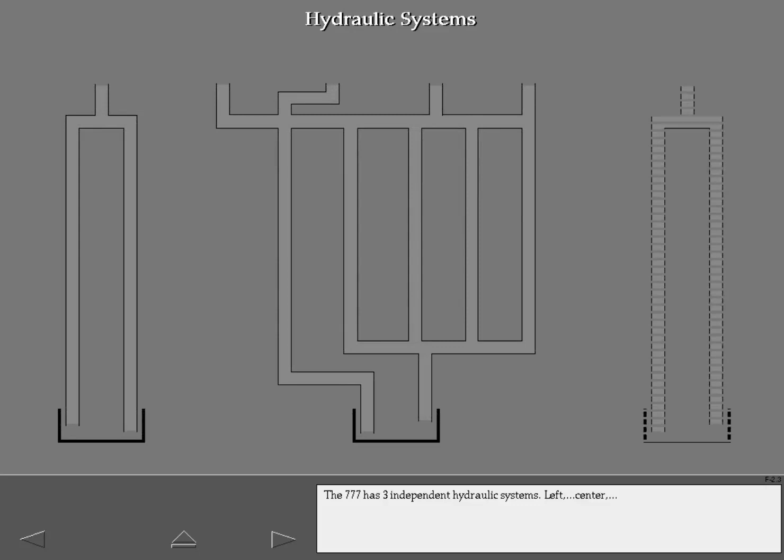The 777 has three independent hydraulic systems: left, center, and right. Each system has its own reservoir.

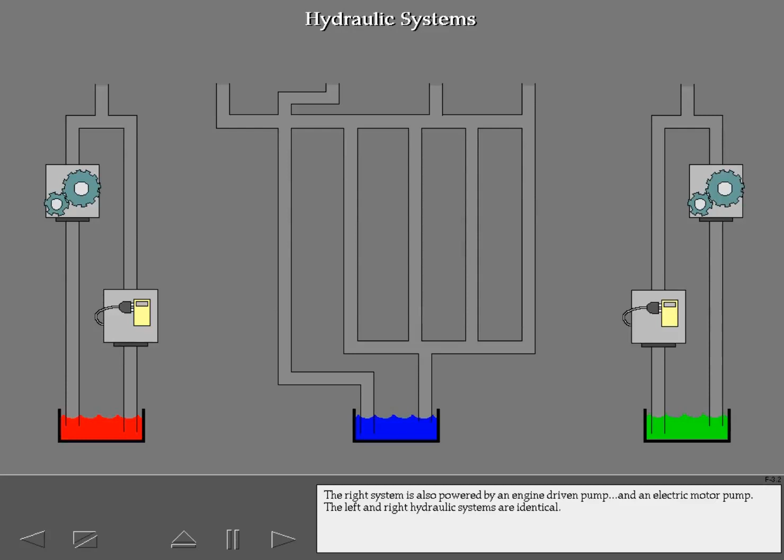The left system is powered by an engine-driven pump and an electric motor pump. The right system is also powered by an engine-driven pump and an electric motor pump. The left and right hydraulic systems are identical.

The engine-driven pumps are the primary pumps. They are the main source of hydraulic power and operate when the engines are running. The electric pumps are the demand pumps. They supplement the primary pumps when system demand is high.

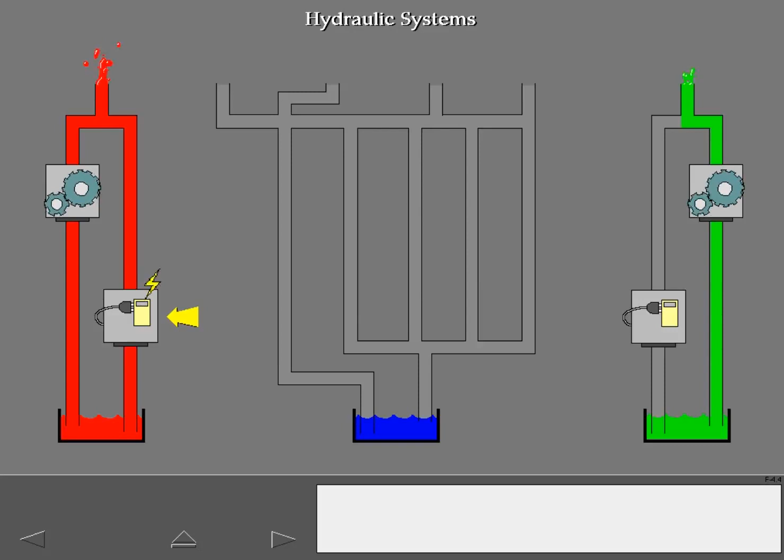The center hydraulic system uses two electric pumps as the primary pumps. Two air-driven pumps serve as demand pumps. The air pumps are powered by bleed air. Depending on demand, one or two pumps operate.

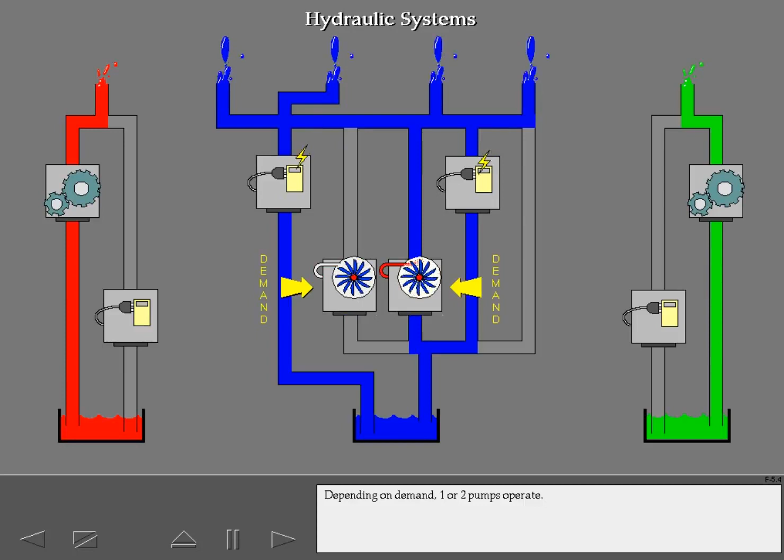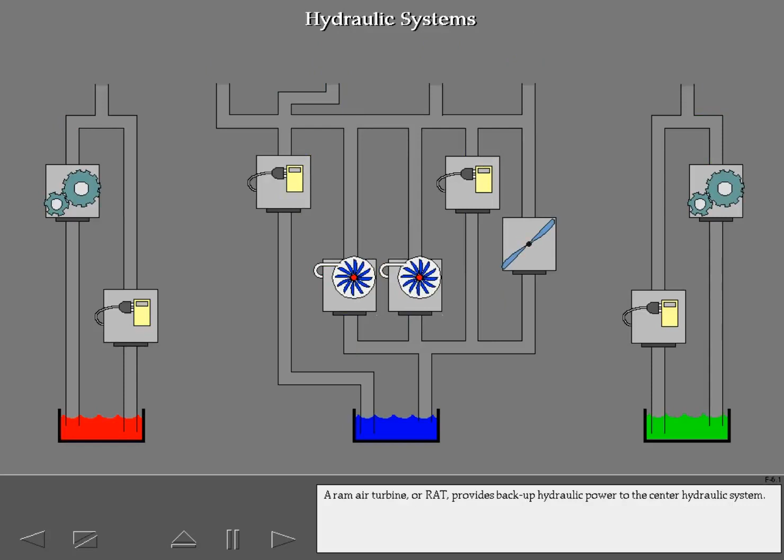A ram air turbine, or RAT, provides backup hydraulic power to the center hydraulic system. The airstream powers the RAT.

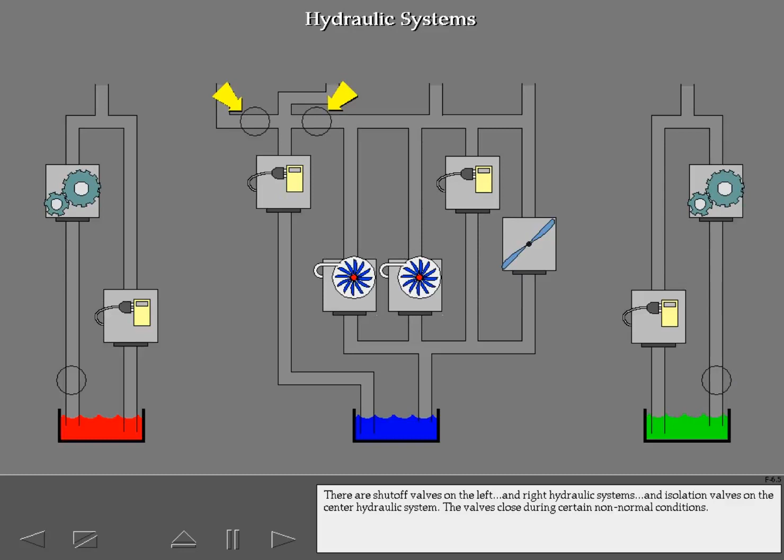There are shutoff valves on the left and right hydraulic systems and isolation valves on the center hydraulic system. The valves close during certain non-normal conditions.

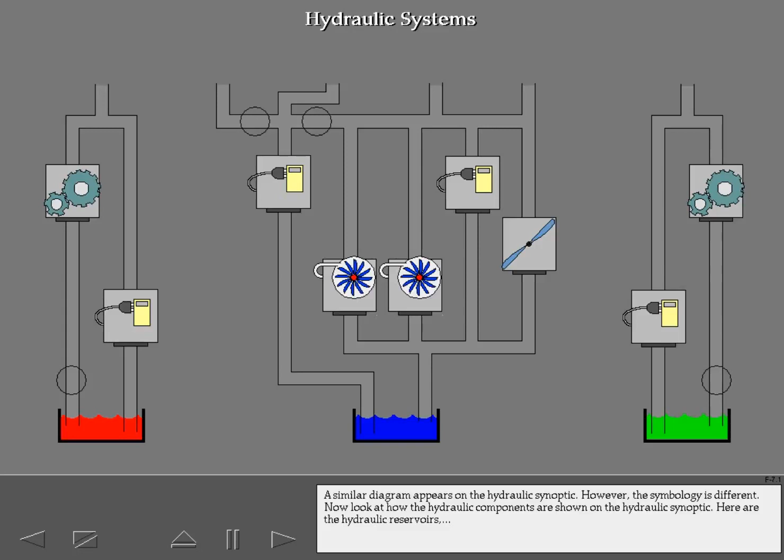A similar diagram appears on the hydraulic synoptic. However, the symbology is different. Now, look at how the hydraulic components are shown on the hydraulic synoptic.

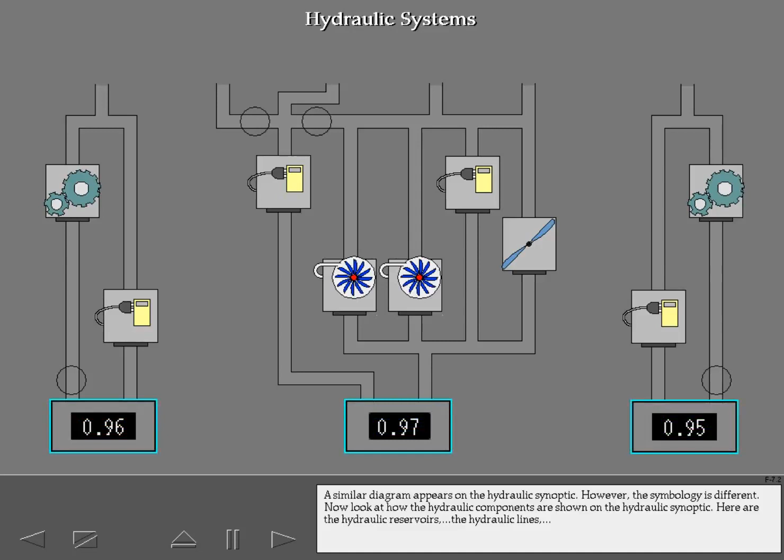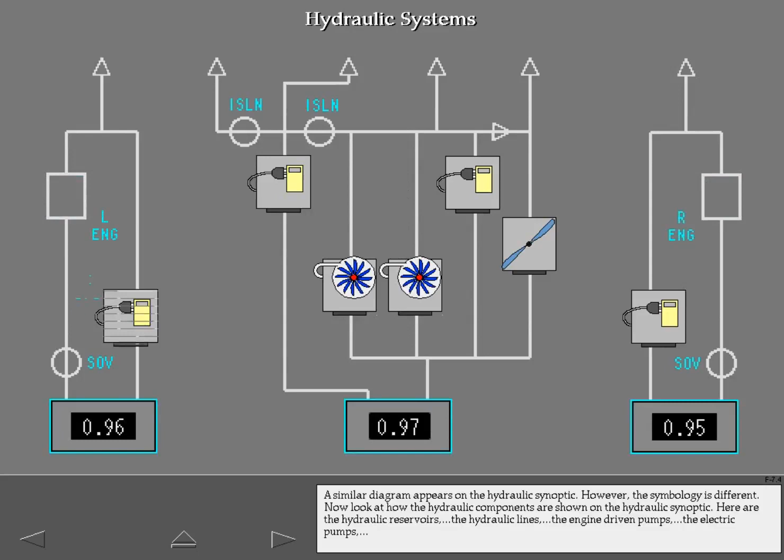Here are the hydraulic reservoirs, the hydraulic lines, the engine-driven pumps, the electric pumps, the air-driven pumps, and the RAT.

This diagram is part of the hydraulic synoptic. Select the hydraulic synoptic to view the complete synoptic.

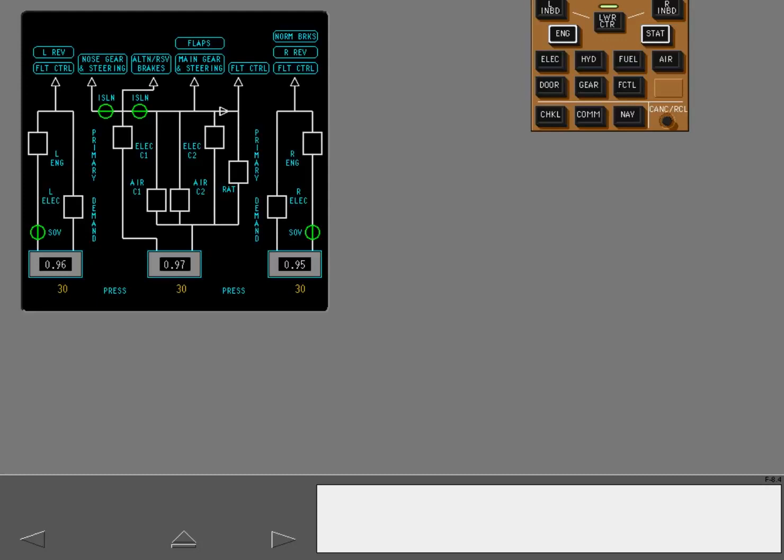In addition to the diagram of the hydraulic components, the hydraulic synoptic shows the hydraulically powered systems, system fluid quantities in % of normal service level, and system pressures in PSI. System pressure is amber if pressure is low.

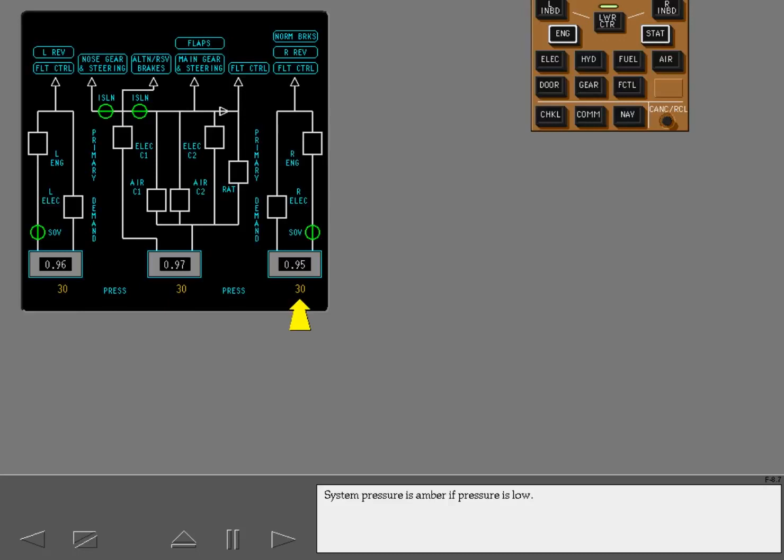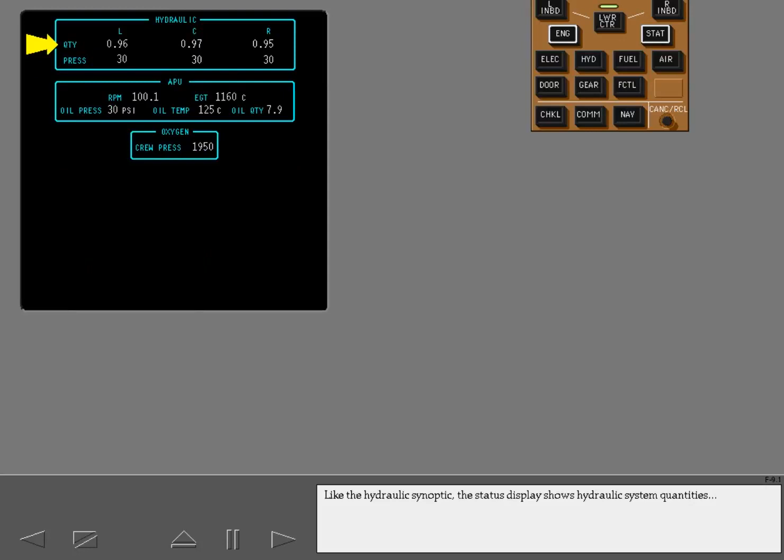Hydraulic system information can also be seen on the status display. Select the status display. Like the hydraulic synoptic, the status display shows hydraulic system quantities and pressures. If a hydraulic reservoir requires refilling, RF appears next to the system quantity.

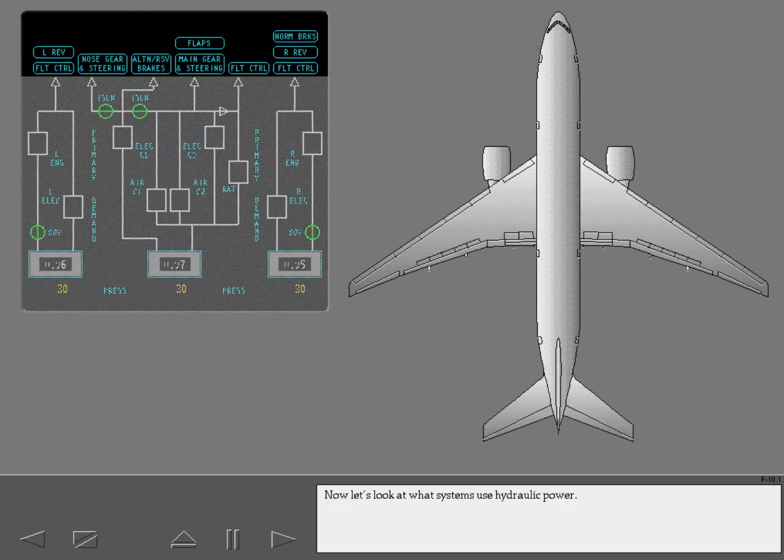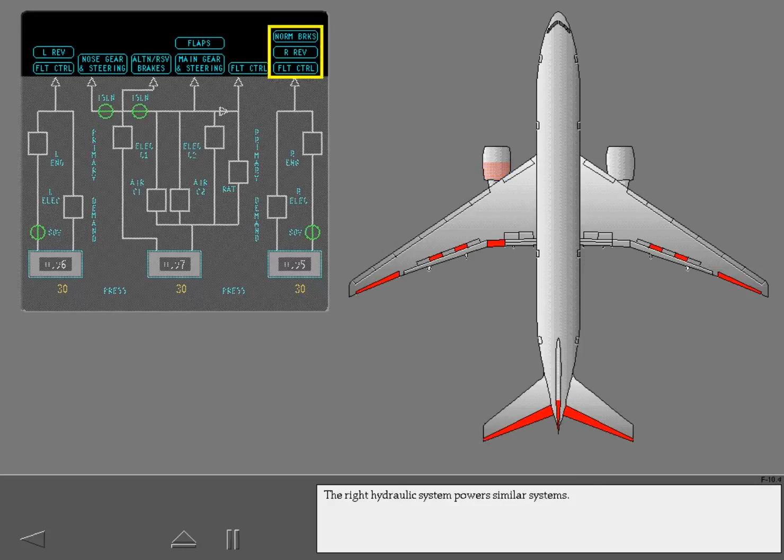Now let's look at what systems use hydraulic power. The left hydraulic system powers the left thrust reverser and some of the flight controls. The right hydraulic system powers similar systems. It powers the right thrust reverser and some of the flight controls.

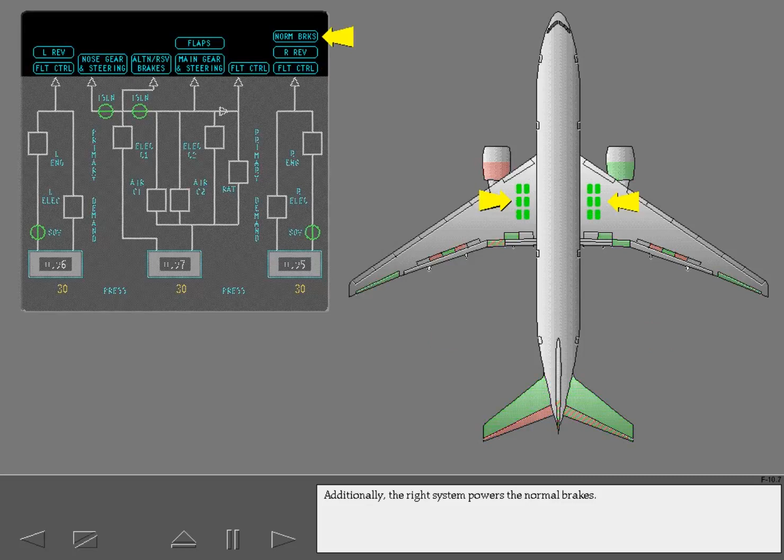Additionally, the right system powers the normal brakes. These systems are powered by the center hydraulic system. The center hydraulic system also powers some of the flight controls. Any one system can adequately power enough of the flight controls for safe flight.

The center hydraulic system also powers the flaps and slats, as well as the landing gear, steering, and the alternate and reserve brake systems.

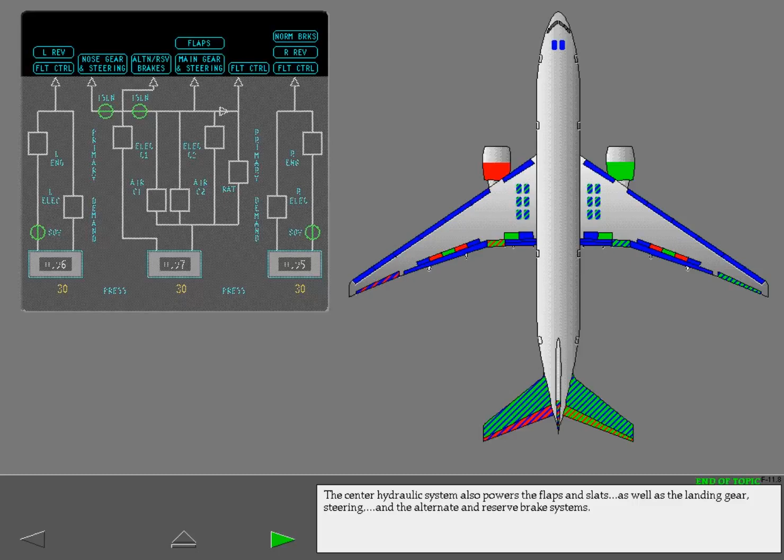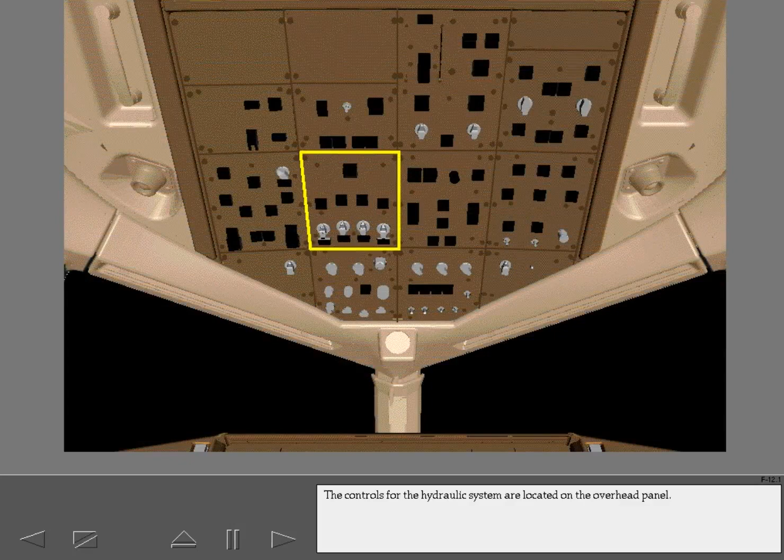The controls for the hydraulic system are located on the overhead panel. This is the normal panel configuration prior to initial power-up. Verify the RAT unlocked light is extinguished. The C1 and C2 primary pump switches are off, and the demand pump selectors are off.

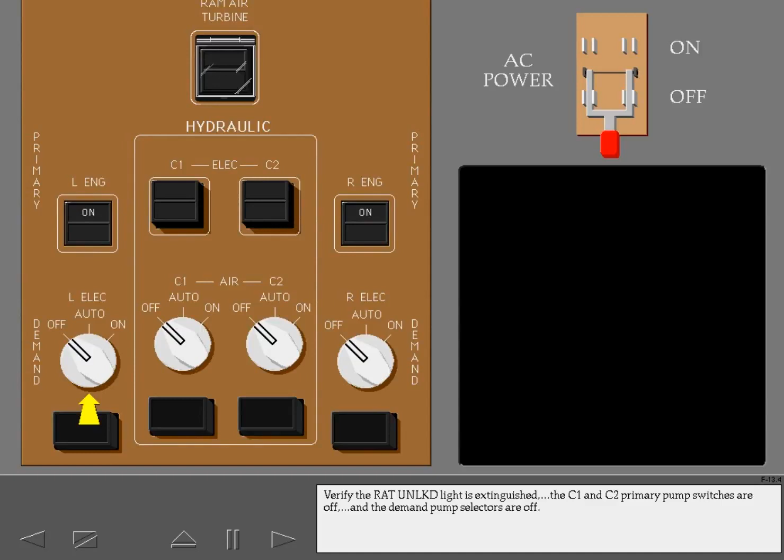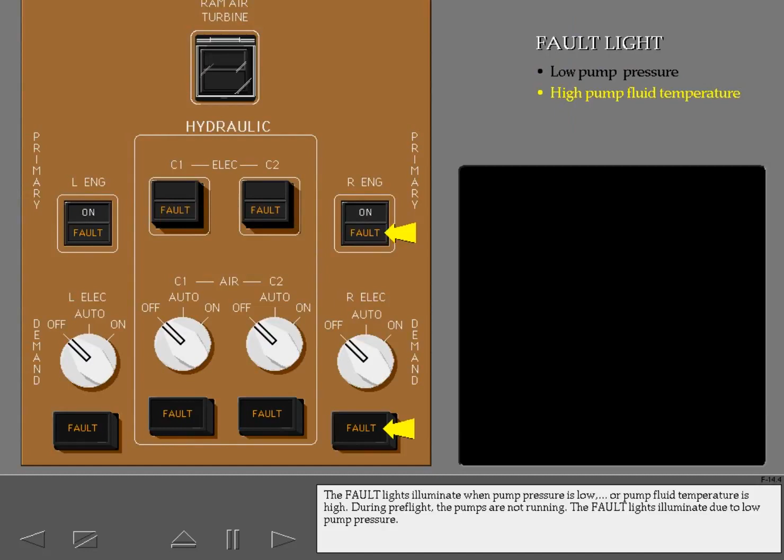Once AC power is established, the fault lights illuminate. The fault lights illuminate when pump pressure is low or pump fluid temperature is high. During pre-flight, the pumps are not running. The fault lights illuminate due to low pump pressure.

Select the hydraulic synoptic. Configure the hydraulic panel for engine start. First, rotate the right demand pump selector to auto.

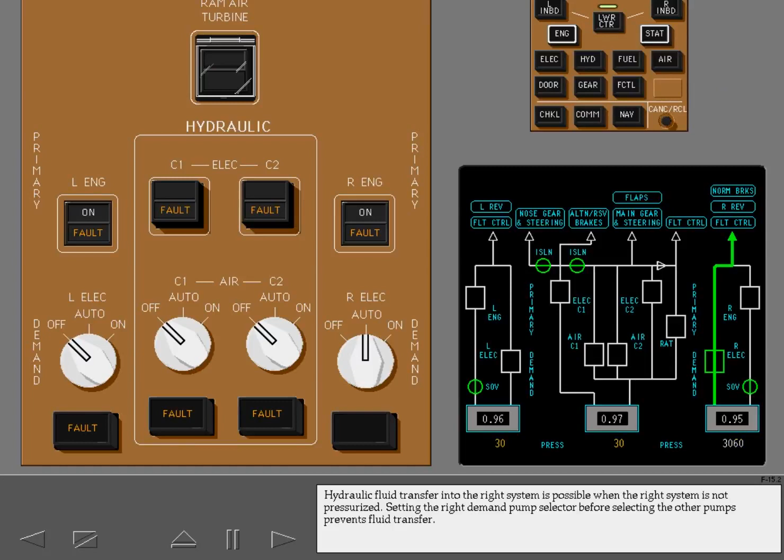Hydraulic fluid transfer into the right system is possible when the right system is not pressurized. Setting the right demand pump selector before selecting the other pumps prevents fluid transfer.

Next, turn on the C1 and C2 primary pumps. Touch the highlighted area. Now rotate the remaining demand pump selectors to auto.

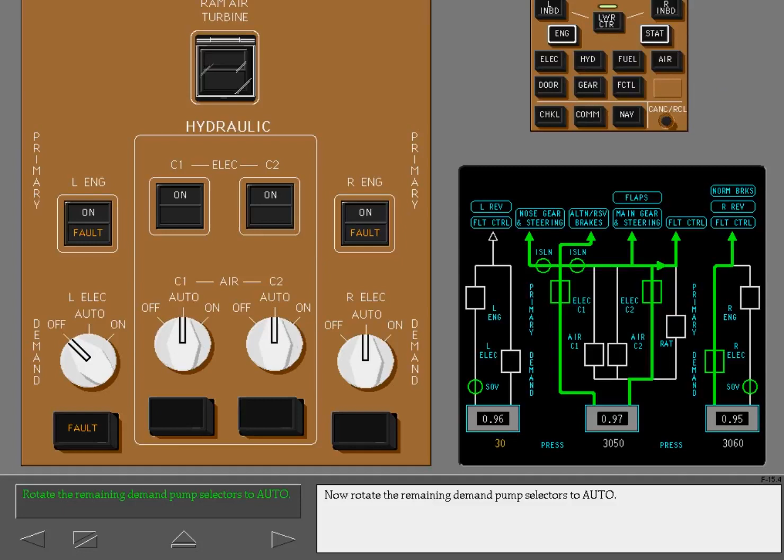In the auto position, the demand pumps operate only when additional system output is required or when the primary pumps are not running. In auto, the fault lights remain extinguished when the demand pumps are performing their normal automatic operation. Notice the C1 and C2 demand pump fault lights remain extinguished even though there is low pressure at the pumps.

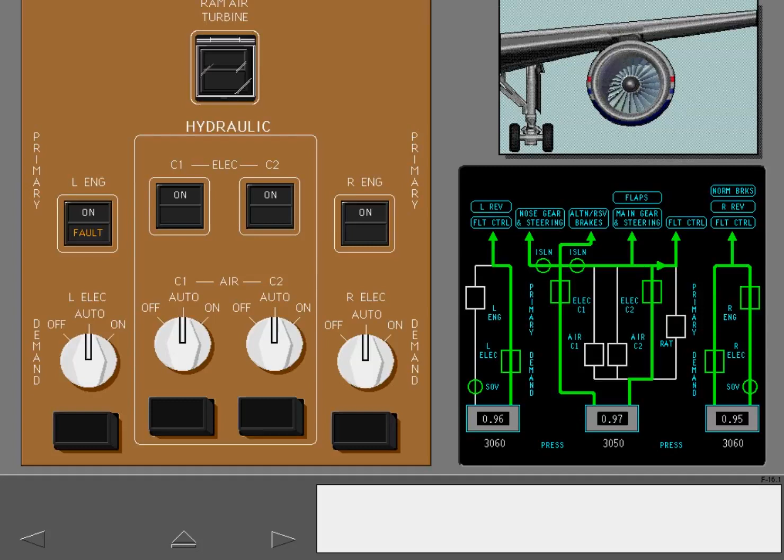During engine start, the left primary pump assumes the hydraulic load for the left demand pump. The right demand pump remains on until the airplane is airborne.

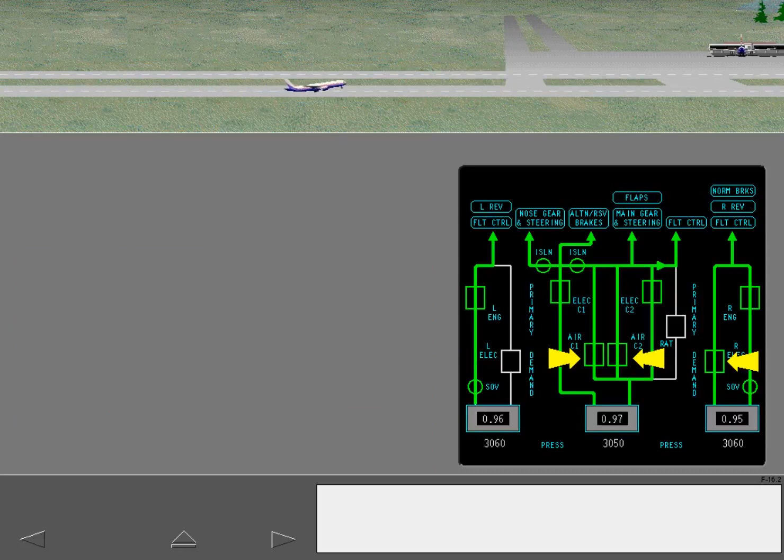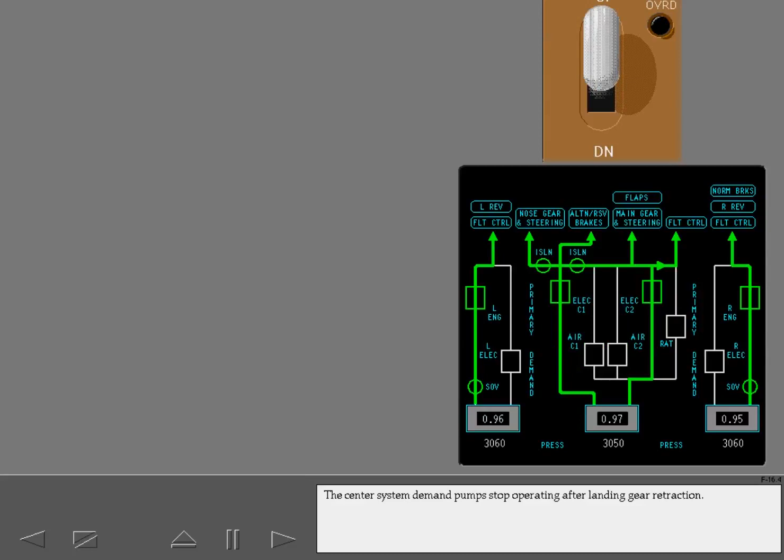The center system demand pumps begin operating during the takeoff roll to be ready for landing gear retraction. Retract the landing gear. The center system demand pumps stop operating after landing gear retraction.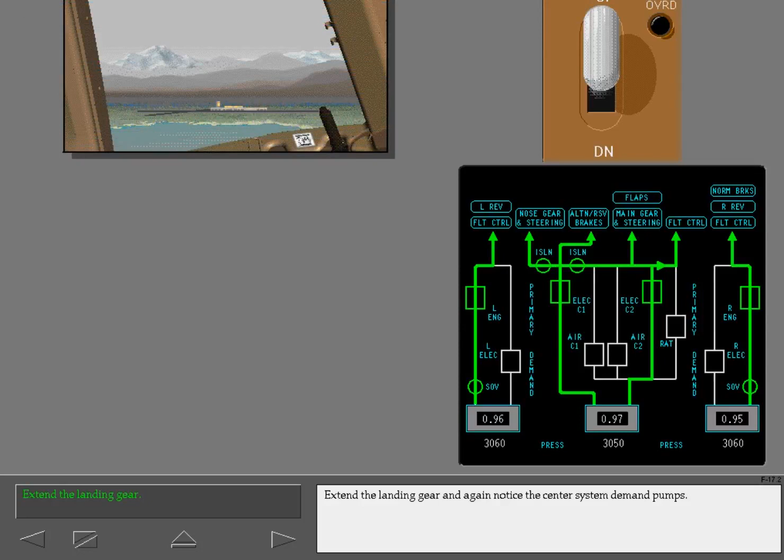Extend the landing gear and again notice the center system demand pumps. Only one demand pump is required in this situation.

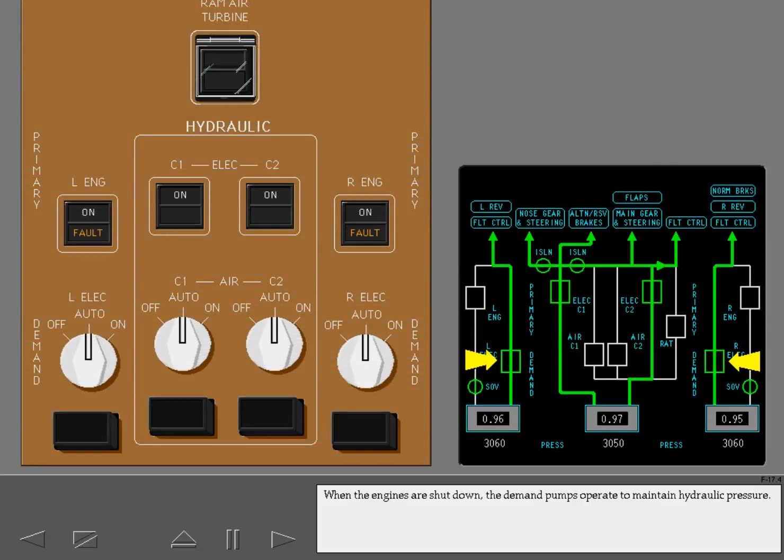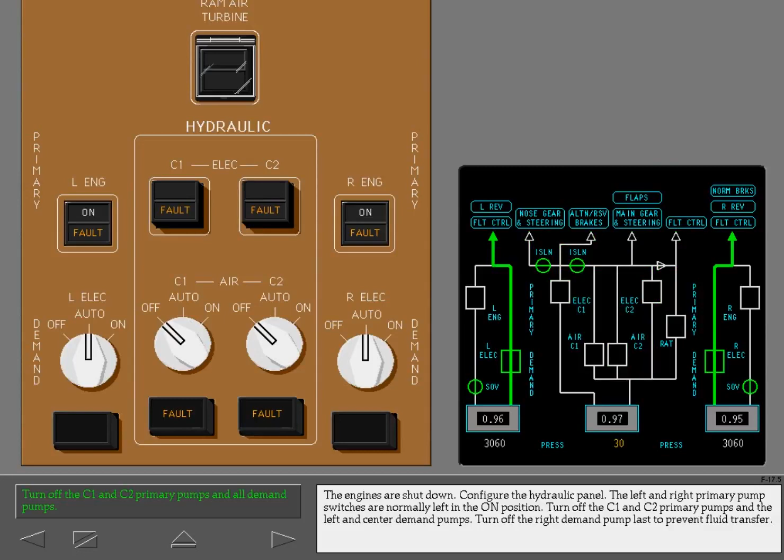Touch the highlighted area.

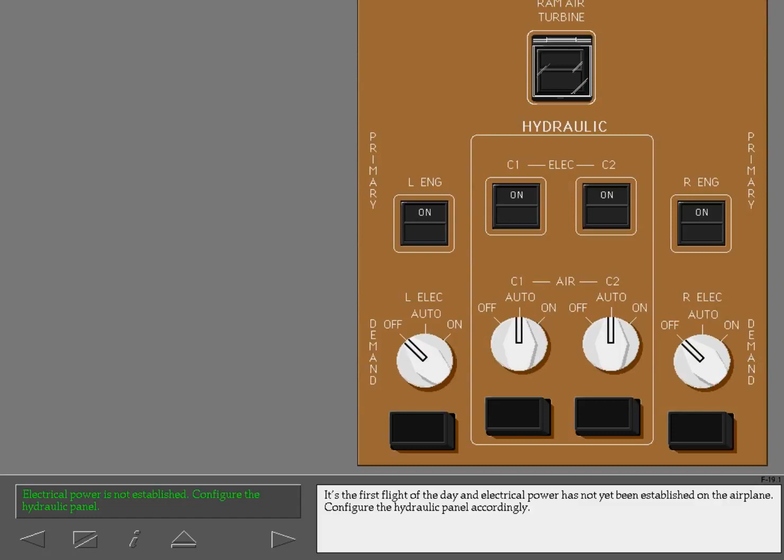It's the first flight of the day, and electrical power has not yet been established on the airplane. Configure the hydraulic panel accordingly. All pumps should be off except the left and right primary pumps.

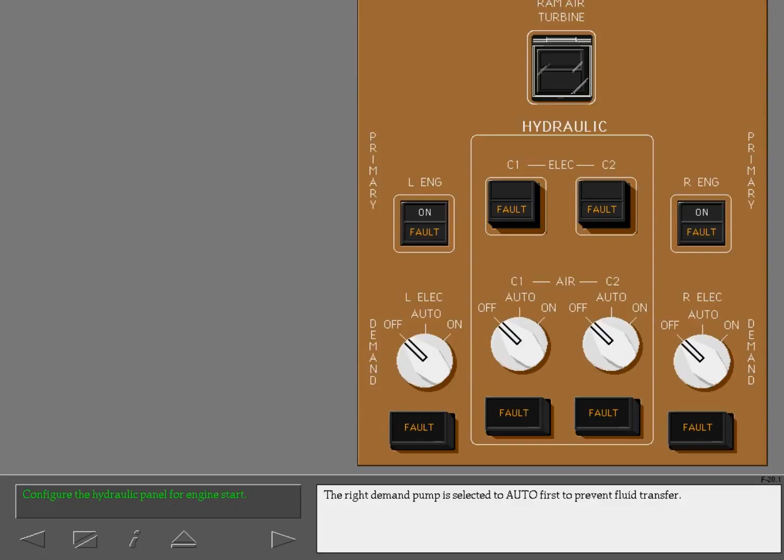You now have electrical power and are setting the panels for engine start. Configure the hydraulic panel. The right demand pump is selected to auto first to prevent fluid transfer. Touch the highlighted area.